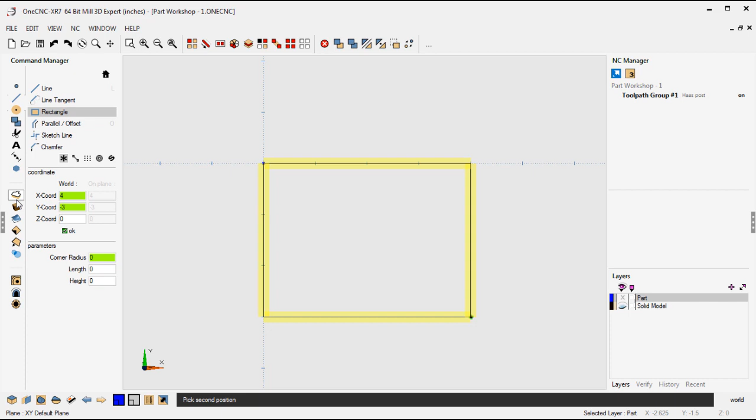When you create a rectangle, you're really defining two opposing diagonal corners. Well, the first corner is going to be at x0, y0. So I'm just going to left click right there on the datum. And then over here within the coordinate input, for x, I'm going to type in 4. And for y, I'm going to type in -3. That's defining the second opposing diagonal corner. We'll click OK to that. Right hand mouse click, and there we go. Very good. There's the very beginning of our part.

Let's go back to the print now. That looks good. Now what we want to do is create this diagonal line. Now in this example, the diagonal line, the angle is being referenced off this theoretical vertical line, and you can see it's 60 degrees. Well, in most CAD systems as well as OneCNC, the angle of a diagonal line is really measured off the horizon. In other words, measured off of a theoretical horizontal line. So for 60 degrees measured off a vertical line, the angle measured off a horizontal line would be 30 degrees. So we want to create a 30-degree diagonal line.

Now the beginning of this line starts at this dimension here, and you can see that from the bottom left-hand corner, it's measured up 2 inches, and it's right at x0. So for us to create this, remember our datum's up here at the top. We want this diagonal line to start at y-1 inch, x0. So let's build that. Let's head back over here.

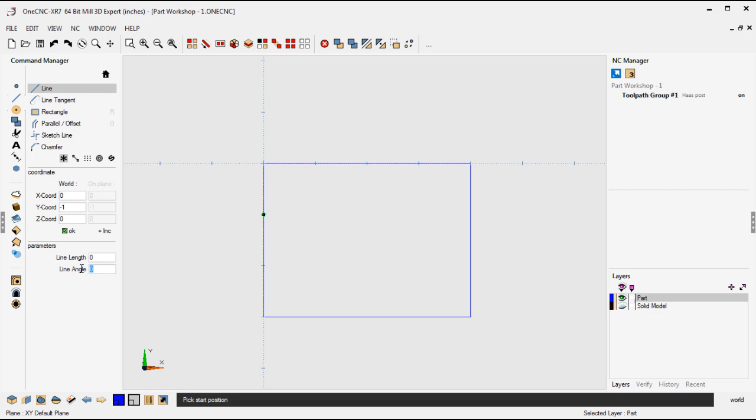Let's go into our line tool, and we know that it's going to be at x0. So I can go right down here to the y coordinate. I'm going to type in -1. And I'm going to click OK, and that defines the start point. Now I can type in the angle of 30 degrees. Remember, that's measured off the horizon. Take my cursor into the drawing area, just come anywhere over here, left-hand mouse click, and then right-click. That looks great. And then when you're done, you can right-click one more time.

Now what we want to do now is trim. Let's head back over here to the main toolbar. Here's our trim tools, and the best one to use is Trim 2. Trim 2 is very simple in that you're going to be selecting two entities, and you want to select the portion of the entity that you want to keep.

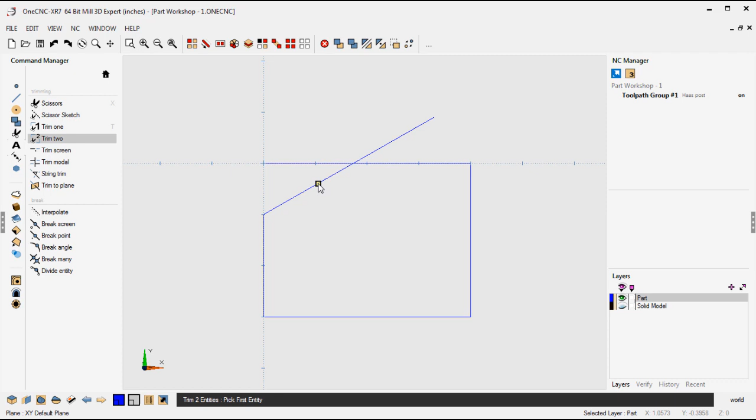All right, so in this example, I want to keep this portion of the vertical line. I don't want to keep that. I want to keep this portion, so I'm going to left click, and I want to keep this portion of the diagonal line. Very simple. Let's repeat the process up here for this trim. I want to keep that portion, so left click. I want to keep that portion of that line, left click, and when we're done, right hand mouse click. Very, very good.

So I'm going to rotate this by holding down the middle mouse button and just rotate our view just a little bit. That looks great. And the next thing we want to do now is we want to extrude this into a solid.

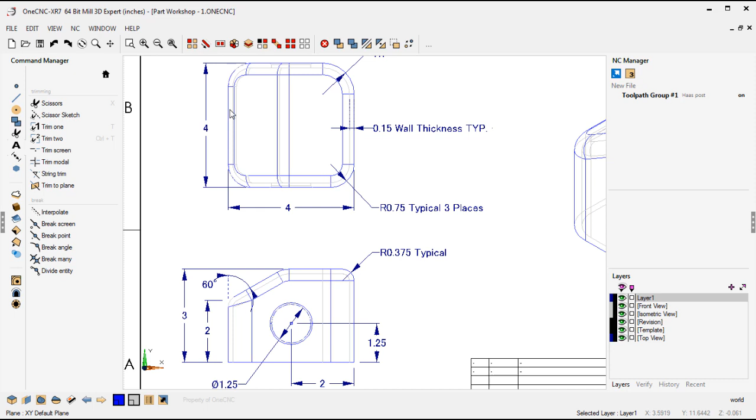If we come back here to our print, we can see that we really want to extrude this 4 inches in this direction. All right, so we can easily do that by coming over here, and let's go into our extrude tools. What you want to do is you want to use this option called Extrude Curves. Extrude Curves will allow you to select a simple closed boundary. That's what we have here, and we can extrude that into a solid.

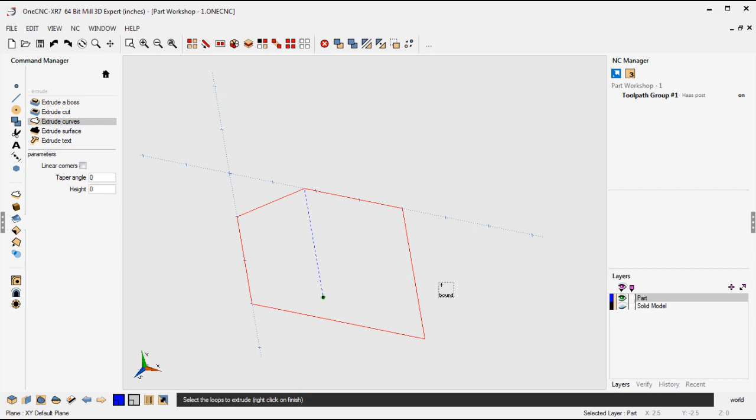So I'm going to left click, take your cursor, and you can left click anywhere you want on the boundary. I'm going to left click right there. Once you've done that, you can see it selected. It all turns red there. Just right-hand mouse click, and now you can dynamically move your mouse backwards and forwards. That gives you the ability to extrude in the positive direction and in the negative direction.

We want to extrude negative 4 inches. So where it says height here, I'm going to type in -4, and then just take your cursor into the drawing area, left click to execute the command, right-hand mouse click to finish. And there we go. There is our solid model. Really simple to do, and our model is looking great.

Now let's put the fillets on here. So let's head back over to our print. We can see that in the upper right hand corner, that fillet is actually 1 inch. These 3 fillets here are 0.75. And I also believe that this fillet right here along the top is also 0.75. So let's put those in.

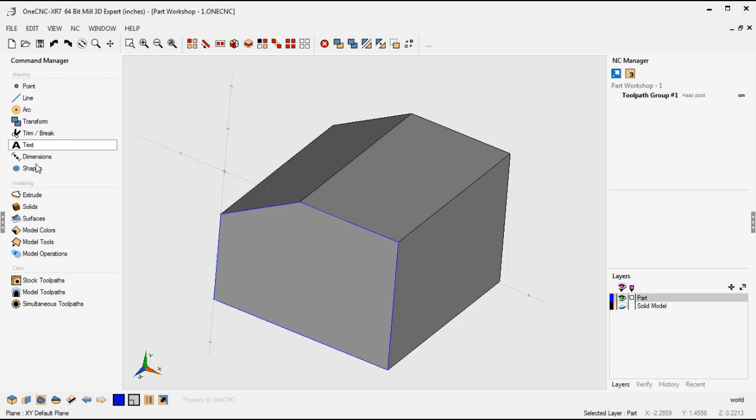So let's head back over here and let's go back to our main toolbar. We're going to select our model tools and we're going to select fillet. Now for the very first fillet we want 1 inch. So where it says radius we're going to type in 1. We'll click OK. Notice how our solid model turns translucent. That way we can select any edge that we want. I'm going to left click that edge there, right hand mouse click to execute the command, and there you go. There's a 1 inch radius put on there very easily.

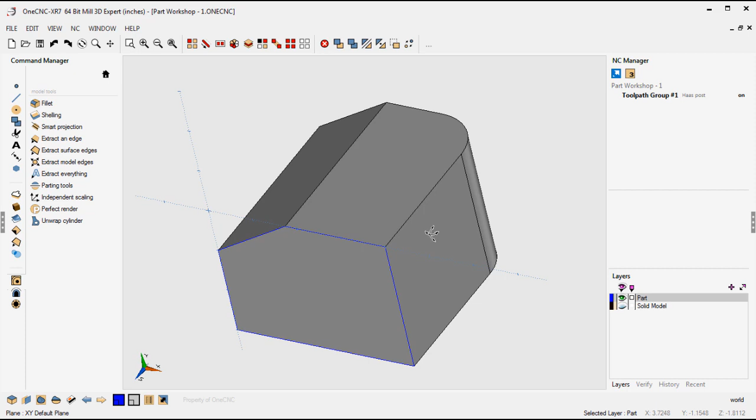Now let's put the remaining 0.75 fillets on there. Let's change that to 0.75. We'll click OK, and I'm just going to left click these 3 edges as well as the edge along the top, and then right hand mouse click. And there we go. That looks very, very good.

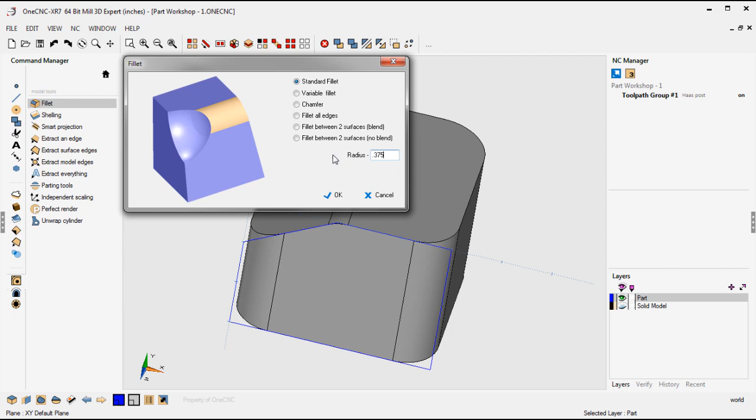Now the last fillet I want to put on here is the fillet that goes all the way around the top there. And that's going to be a 0.375, I believe. Let's go back in and double check that. Yep, it's a 0.375 fillet that goes all the way around. So let's put that on there. We'll go back into fillet. We're going to change this to 0.375. We're going to click OK to that. And then you can just left click anywhere you want along the boundary. I'm going to left click right there, right hand mouse click, and there we go.

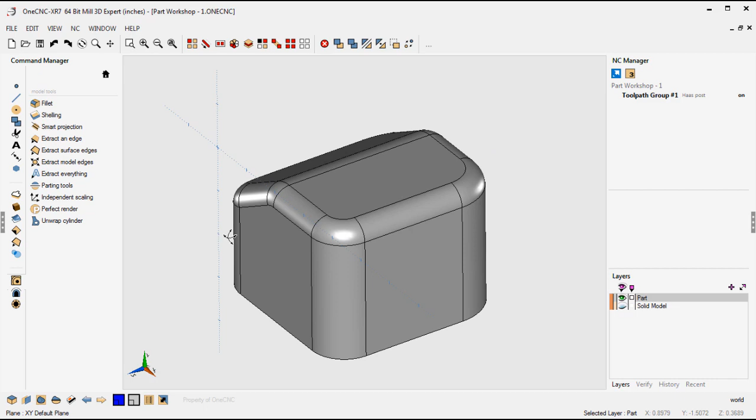Now, we no longer need this blue geometry. The fastest way to select that really would be come up here, select by color, just left click blue, click OK, then hit the delete key on the keyboard. So our solid model is looking really well. What we want to do now though is we want to rotate this so that it's in the correct orientation. If I hit the spacebar twice, that takes us to a top view, and you can see that we want to rotate this.

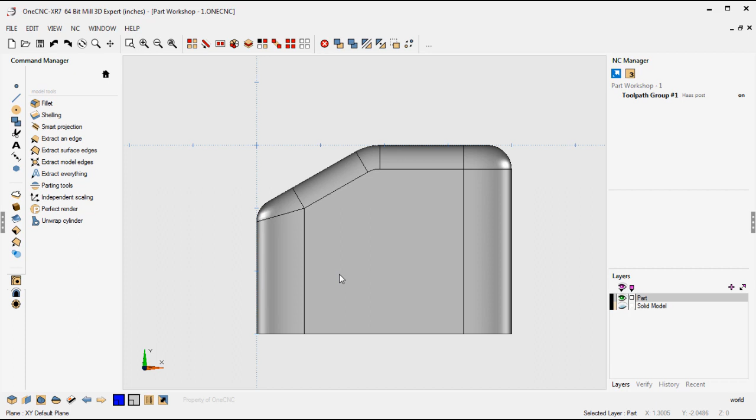Now to rotate something within OneCNC, or if you want to move something or mirror it, you need to select it first. The easiest way to select everything on the screen is simply just hit Control A on your keyboard, or if you want you can select that option there. That will do exactly the same thing. With that geometry selected, we're going to go to Rotate. I'm going to select the Rotate tool.

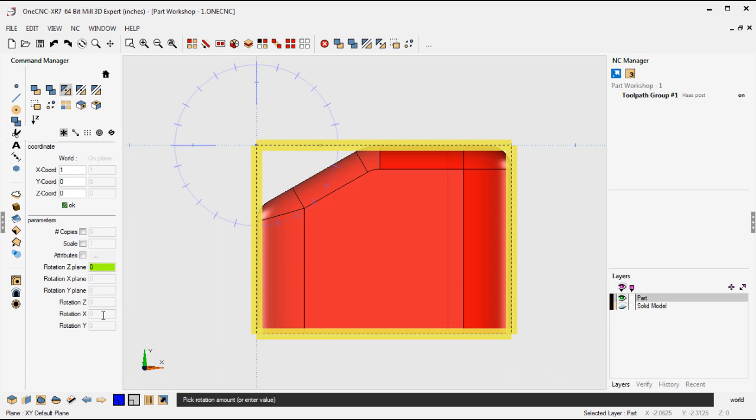Now down here it says pick position to rotate around. Well, you can really pick anywhere you want. I'm just going to use the datum though. So I'm going to left click the datum, and then over here on the left within the main toolbar for X rotation, I'm going to type in 90 and then click OK.

All right, now that's looking good. I think the only thing I want to do now is I want to move that part down, because right now here's our datum, our X0, Y0, Z0. For manufacturing purposes, I'm probably going to want that in the upper left-hand corner. So let's take this part and let's move it down 4 inches.

So remember, your geometry needs to be selected first, which it is. We can see it's red there. Let's go into our Move tool, and we want to move that incrementally in Y down 4 inches. Now here's your incremental input. If you don't see your incremental input, just simply click on the plus button and that will expand the menu down to where you can see this.

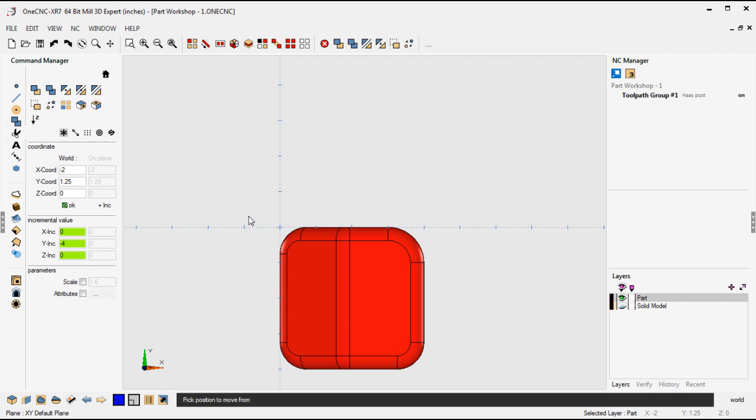Now for Y, I'm going to type in -4 inches, and then we're going to click OK to that. And that looks very good. Let's deselect everything by clicking this button, and let's take a look at what we have. That looks great. Now what we want to do now is we want to shell this. This is very easy to do, and let me demonstrate how we can do that.

All right, now to shell this, we're going to come over to the main toolbar, and we're going to come down here to our model tools, and there we're going to find our option called shelling. Let's select that, and let's take a look at the parameters here. We want to shell inwards, and for the settings we want a wall thickness of 150 thousandths, and I definitely want to remove a face, so I have this option checked here.

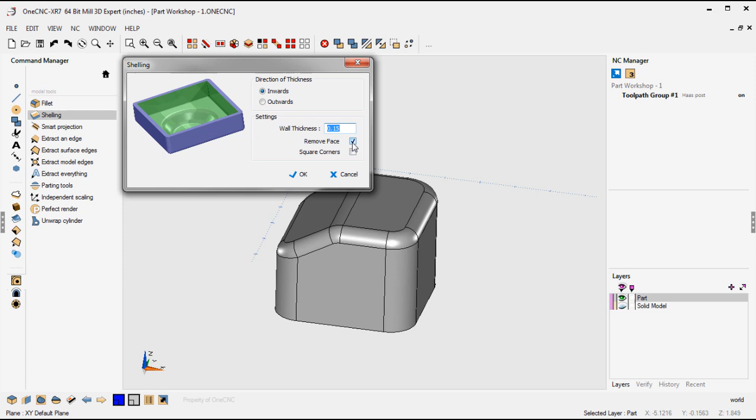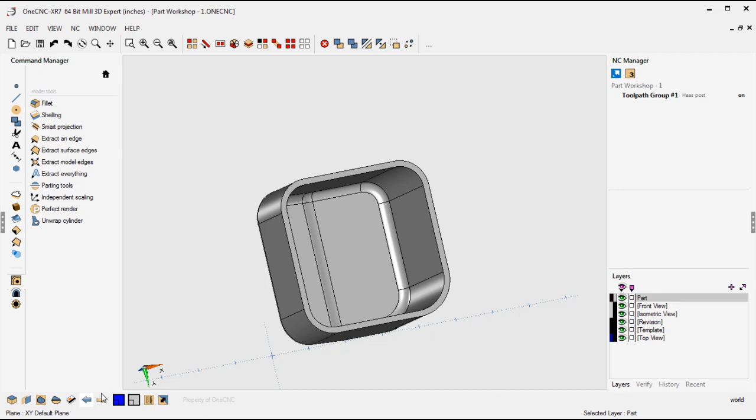All right, now what we want to do next is we want to put the hole in. So let's go to a front view. Okay, so we're going to put this hole in right here, but you're going to notice that the hole is actually dimensioned from the lower right hand corner right down here. So our goal is we need to create a construction plane that has its origin right here. It's X0, Y0, Z0, so we can place this hole exactly where we want it. Okay, let me show you how we can do that.

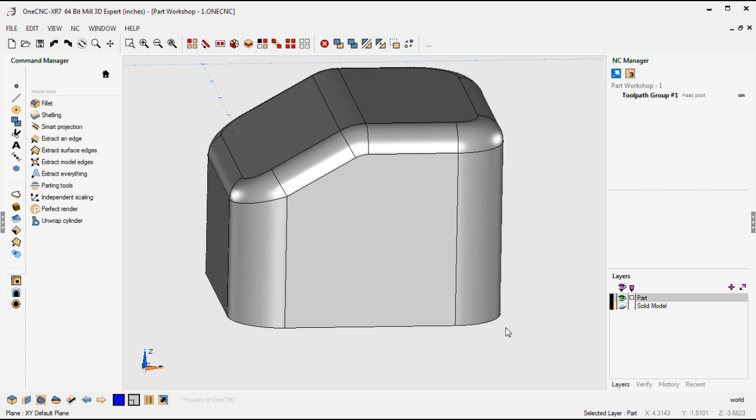Let's head back over here, and what we want to do is create a construction plane on this face. So before I do any of this, I'm going to create a point, and the point that I create is going to be the location of the datum of the construction plane. Now, right now, you can see in this lower right-hand corner, there's no point. There's really nothing I can grab a hold of. So a real easy way to create this point is just snap it right here on that vertice right there.

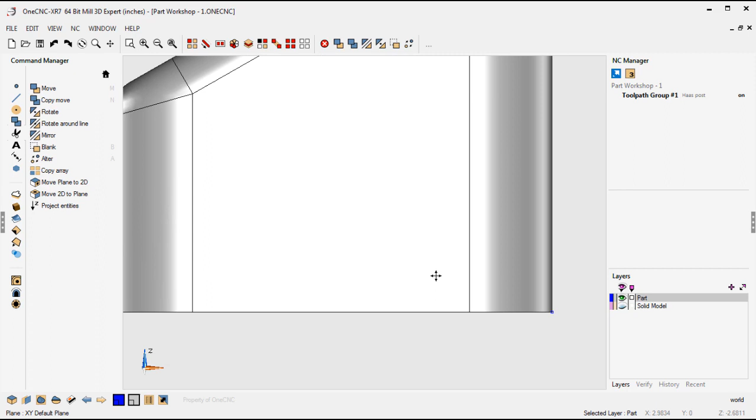And then if I select that point by hitting the letter S on the keyboard, left-hand mouse click, and then if I go into the Move tool, I can incrementally move that to the right 750 thousandths. Why am I going 750 thousandths? Well, simply because that is the radius of the fillet we put on there. So let's go to a front view by hitting the space bar. We'll go to front view. You can see that that point is exactly where we want our new construction plane to be.

Okay. All right, let's head over here to our construction plane tools. It's located in the lower left-hand corner. All these options at the top of the dialog box, these allow you to define or modify a construction plane, and these are the default construction planes that are available for every brand new project or part file.

Okay, let's use this option right here to create a construction plane from 3 points. This is going to allow us to designate the origin. This is going to be the X0, Y0, Z0. The next point I digitize becomes X positive, and the third point I digitize becomes Y positive.

Now remember, I've already designated my X0, Y0 and my X positive, so I can really snap any one of these points right here to be Y positive. I'd get the exact same results. I'm going to left click that one right there, and now we have a brand new construction plane.

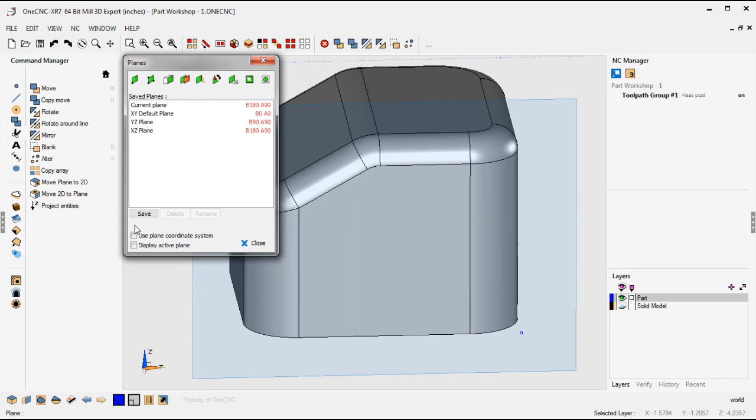Let's go back into our construction plane tools, and I'm going to tell OneCNC to show the current construction plane, and I'm also going to tell OneCNC to use the brand new coordinate system. That's going to also display our little datum marker down there. Let's click OK. So there's our construction plane and there's the datum.

You might be asking, why didn't I just digitize that point as the location for our brand new construction plane? Well, I could have, but remember, I need to select 3 points, and there's nothing here over on the right in which I could have selected for my X positive.

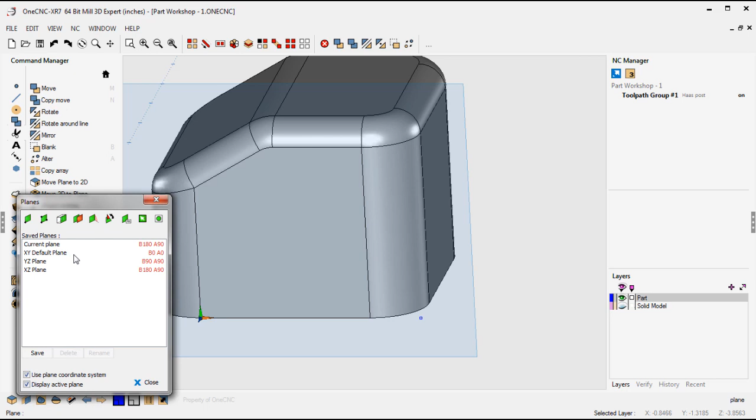So instead, I used the geometry already available on the solid model to first get the construction plane created and oriented. So what I'm going to do now is go back into my construction plane tools, and say move the construction plane by using that tool right there. Now I can simply snap that point, and now that construction plane is exactly where we want it. Let's go to our front view, and you can see that's perfect. Now that lines up with our print.

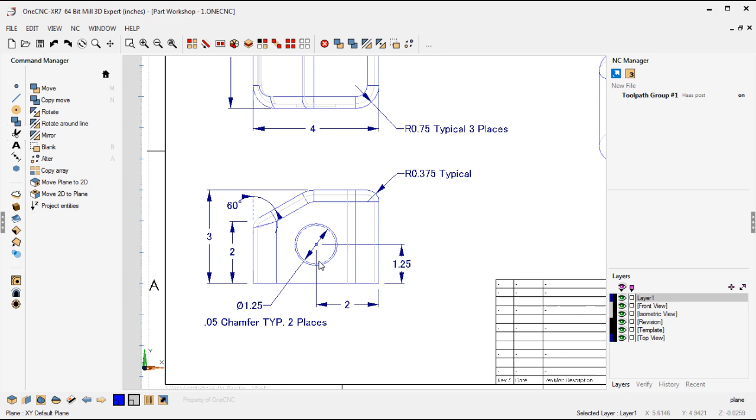If we come over here, I can now define that circle and make sure that it's properly located. Let's do that. Let's head back over here, back to our main toolbar. We're going to select our arc command. From there, we're going to select circle, and I already have a diameter in there of 1 inch 250 thousandths.

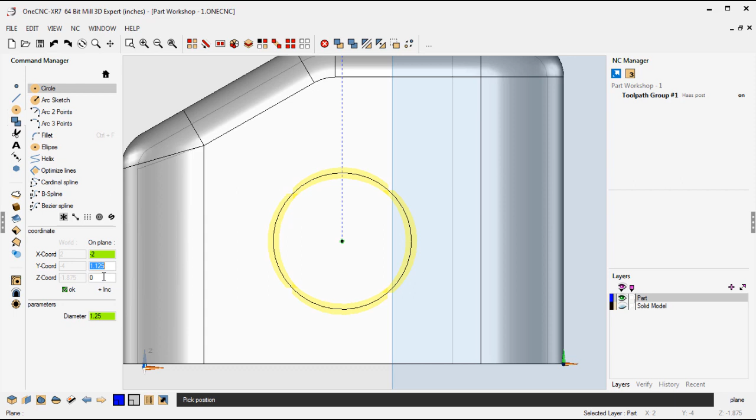Now, when it comes to locating the circle, make sure you use this column here on the right, underneath where it says on plane. That makes sure that all these dimensions are going to be referenced to the current construction plane. For the X dimension, that's going to be minus 2 inches. Remember, it's going to be located from that datum right there. So X minus 2 inches. The Y value is going to be an inch 125 thousandths. That's perfect. And the Z value is going to be 0. That looks very good.

So I'm going to click OK to that. Right hand mouse click to finish, and there you go. We can see that we've created that circle, and it's properly positioned reference to our construction plane.

Now let's use that circle to cut the holes through the part. Very simple. Let's go back over here, into our extrude tools, and this time we're going to use extrude cut. That allows us to select a closed boundary and perform a solid model function. In this case, we're going to be cutting.

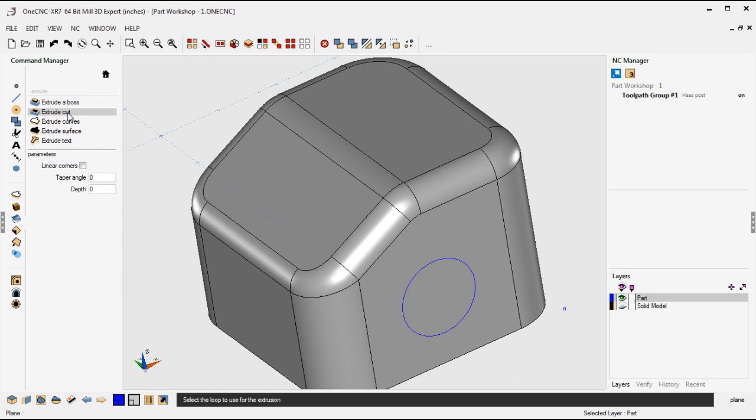So I'm going to left-hand mouse click. Once I do that, I can move my cursor right or left. I'm going to move it all the way over here. Left-hand mouse click, and there you go. There's the hole that's been cut through the solid model. That's looking good. We're going to right-hand mouse click to finish the command.

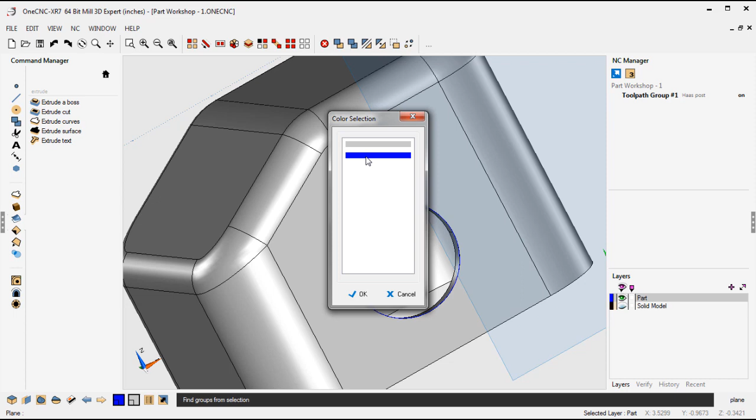We no longer need that blue geometry. So let's use our select by color, left click blue, click OK, hit the delete key on the keyboard. And the last thing we need to do is create the chamfers.

All right, so let's head back over here, main toolbar. We're going to go back into our model tools. We're going to select fillet, but this time we're going to use the chamfer option. And that chamfer value is going to be 50 thousandths. I'll type in 50. We'll click OK.

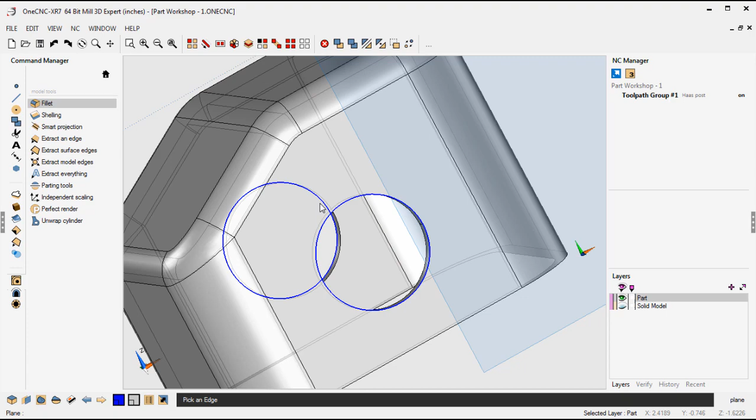I'm simply going to left click that edge. And because our model is translucent, I can easily come over here and left click that edge, right hand mouse click, and there we go. There's the 50 thousandths chamfer.

We no longer need to use that construction plane. Let's go back here to our construction plane tools, and let's go back to default, and we're going to uncheck these two options and click the close button, and there we go. There's our part. Very easy to create, very straightforward.